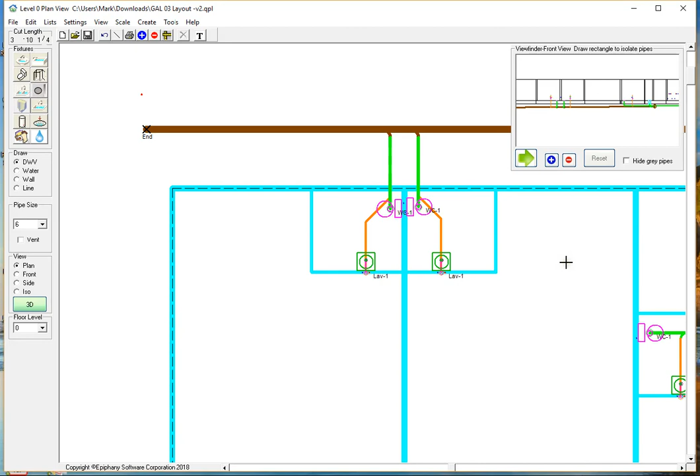Okay, I'm going to pick it up right here. We've got our 6-inch run just to the left of the row of washers, and I'm just going to extend a horizontal 6-inch over to the first washer, and I might move it up just a bit.

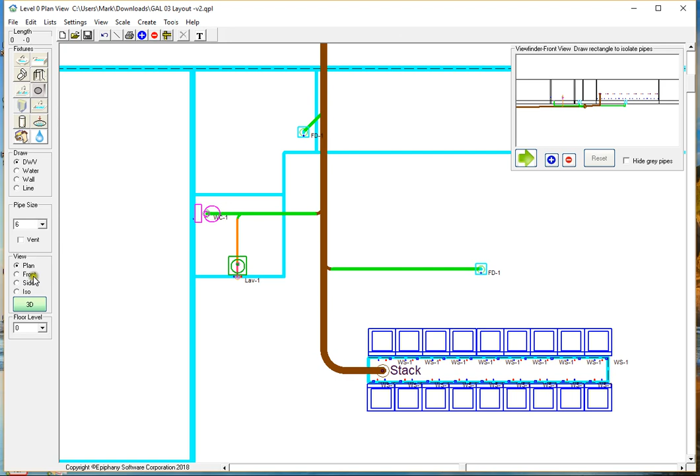And then I'm going to leave the pipe size on 6 and select stack and just click on it. Once it's pulled the stack, I can raise it up to whatever height I want. I no longer need the text, so I'll delete it.

And I want to change this fitting here to a trap. So I'm going to right click the downstream pipe, click change fitting, select trap, click OK.

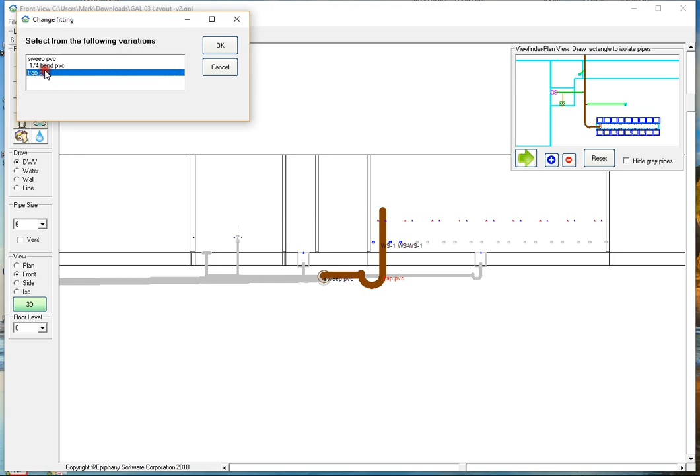Now, in order to do a sanitary tee off of that riser, off of that standpipe, I'm going to have to first set up a 6-inch sanitary tee by going to Settings, Fitting Dimensions, find Sanitary Tee,

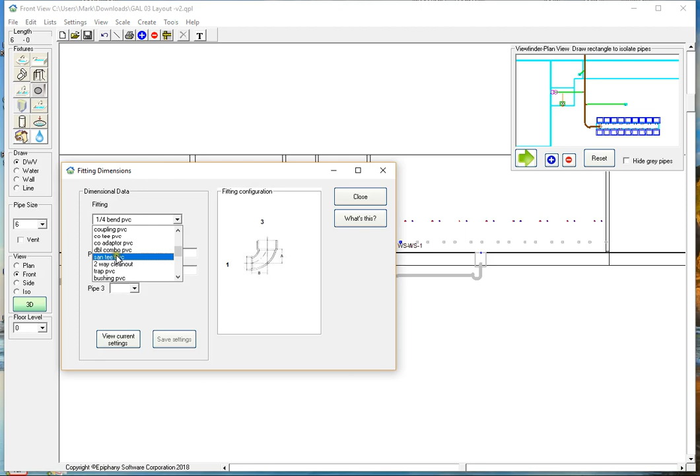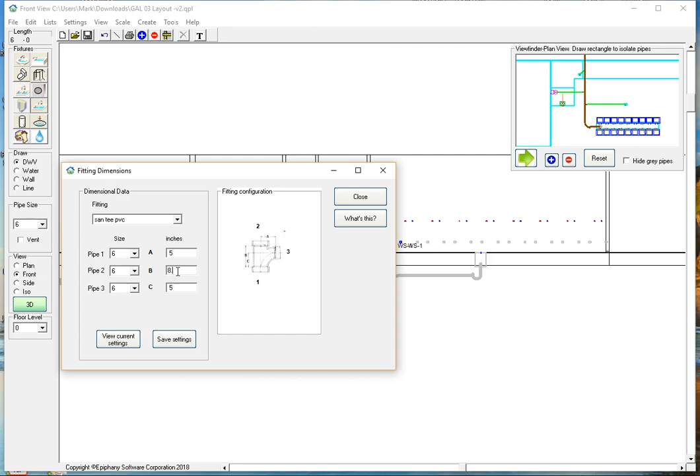PVC, select the size, and the size is going to be 6 by 6 by 6, all three outlets. And the dimensions are going to be, A is going to be 5 inches, C is also 5, and B is 8.5. Click Save Settings and close.

Now, here's another little thing I've got to do. I'm going to have to isolate that standpipe from these washers. Otherwise, it's going to try to connect one of those washers to the standpipe, and I don't want to do that.

So in the viewfinder, I'm going to have to draw a long square rectangle just around that standpipe, and that will isolate the washers. Let me try that again. I don't think it was quite narrow enough.

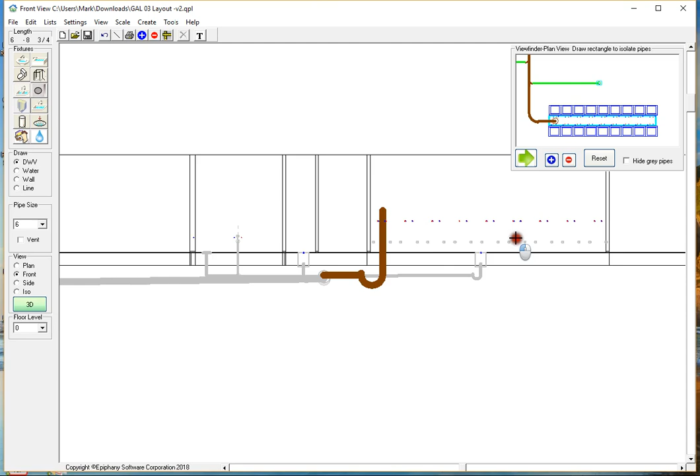Okay, that will isolate the washing machines, and now I should be able to draw a horizontal branch off of the standpipe, and I can see that it is indeed rising upstream in the correct direction. And now I can click on that and raise or lower it to whatever height. I'm going to leave it just above the floor.

And without resetting the viewfinder, I'm going to attach 3-inch vertical risers, one behind each washer, 3-inch vertical standpipes. Of course, you can add as many as you need.

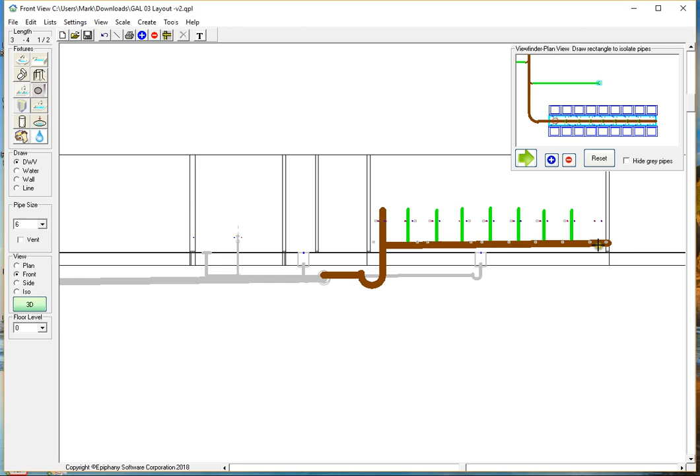And then you might want to leave the 6-inch pipe exposed on the end for a clean out, and put a clean out cover over the end of it. Oops. Now I have to reduce that to 3-inch. And you could also reduce this to 3-inch.

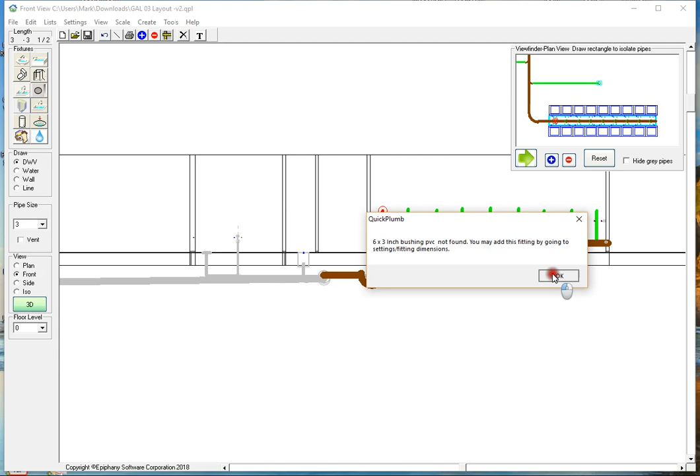But it wants to know about the dimensions of a 6x3 bushing. So I will go in and put that in now. Settings, fitting dimensions, find bushing, PVC. We'll go 6 and 3. And that dimension is going to be, I don't know, something like 1 inch. Save and close.

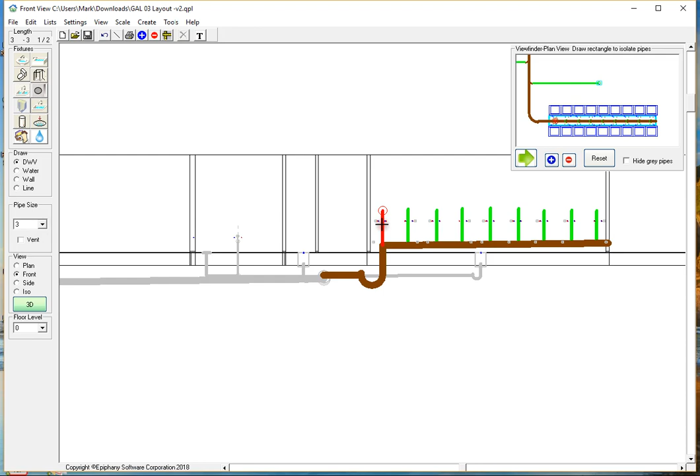And now I can reduce that standpipe down to 3-inch. And there you have it. Now the code might require that to be 4-inch in order to clean out this trap.

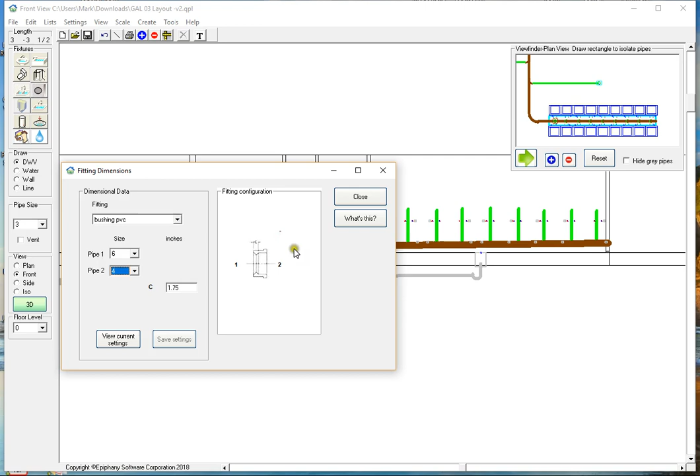And if it does, just go to fitting dimensions, find bushing, PVC 6 and 4, and it gives you almost 2 inches there. So it was already in there. And so we could do this, and that will satisfy the clean out requirement for that trap.

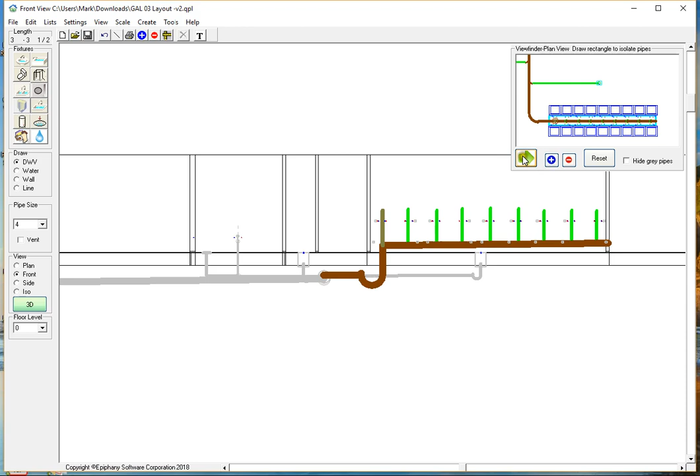Anyway, I wasn't able to determine why it kept drawing a dashed line. Maybe it has something to do with the background plan file. I'll do some further checking on that.